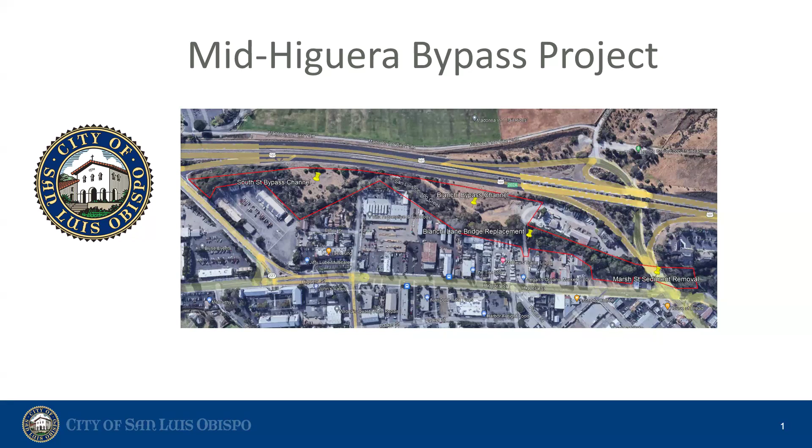Brian, ready? My name is Brian Nelson, I'm the city engineer with the city of San Luis Obispo. I'll be here today to talk about a city project called the Mid-Higuera Bypass Project, also sometimes referred to as the Mid-Higuera Flood Risk Reduction Project, which is a flood control project the city has been working on for decades now at this point.

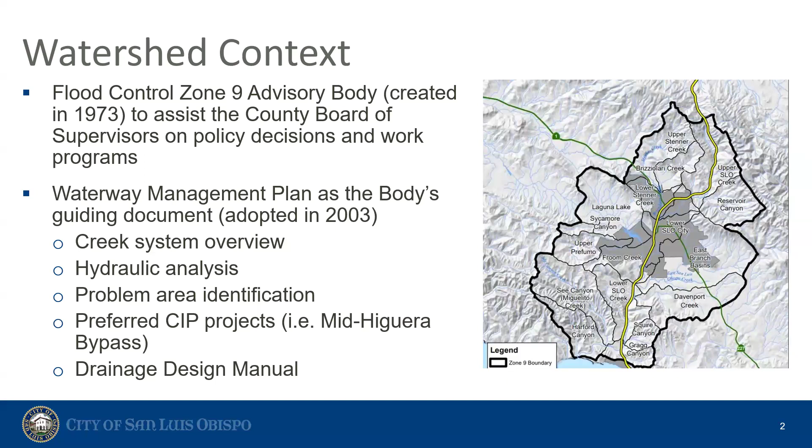This watershed is governed by the Flood Control Zone 9 advisory body to the county, which was created to assist with county policy and project decisions for the zone, as well as provide funding for programs such as this project. The guiding document for the zone is the Waterway Management Plan, adopted in 2003, which provides the framework for the creek system, the hydraulic analysis of the system to show where the flood impacts are, as well as a list of capital projects preferred for flood mitigation, such as the Mid-Higuera Bypass Project. It also establishes the drainage design manual for development within the watershed to minimize future flood impacts from development.

And Brian, I'm just hearing a little bit of making sure that everybody is oriented. So kind of across the freeway is the Madonna grass area. Is that kind of a way for people to get oriented?

Yeah, so here's the 101, so this is the freeway, and then across is the Madonna, the fields. Here is South Higuera along here. So Madonna overcrossing is right here. This is Madonna and South Higuera. Up here is Marsh and Higuera intersection.

Right, okay, so the donut store. Okay, got it. Yeah, so the zone here, the city owns open space on the west side of the SLO Creek between the freeway and the creek. And then there's all these private developments here that have property lines into the creek and sometimes across the creek.

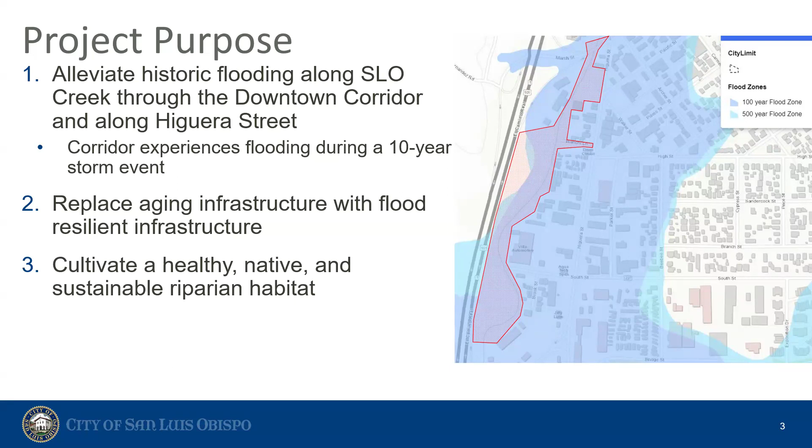So you'll hear me talk about storm return periods like 25-year storm, 10-year storm. Basically what that means is a 25-year storm, for example, has a 1 in 25 probability of occurrence in a given year, or about a 4% probability. So roughly, we generally think every 25 years or so, we might experience a 25-year storm. That's what people think of it.

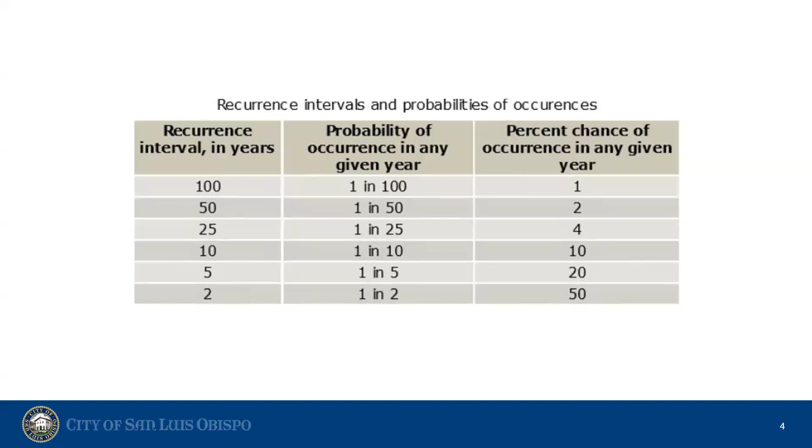So this zone, and actually at the Marsh Street Bridge, if its maximum capacity can maybe serve a 25-year storm, but with still build up in the creek, the Marsh Street Bridge actually can only handle a 10-year storm. And looking, because I think pictures tell 1,000 words in this, the location of this project, the upstream end at Marsh Street Bridge, is a site of flooding over the last 50 plus years.

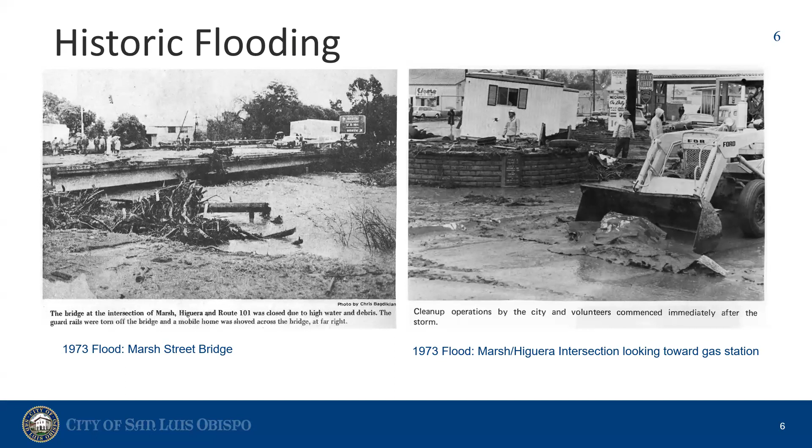Just a couple more photos here. Another flood occurred in 1973. Here again, the Marsh Street Bridge, there's the on-ramps after the flood waters receded. And then you got some cleanup work here after that same flood at the Marsh and Higuera intersections. It's the back here where I'm pointing is the gas station.

And of course, we all know about last year's flood. We saw the exact same thing occur, just proof that some flood control was needed in this area of town.

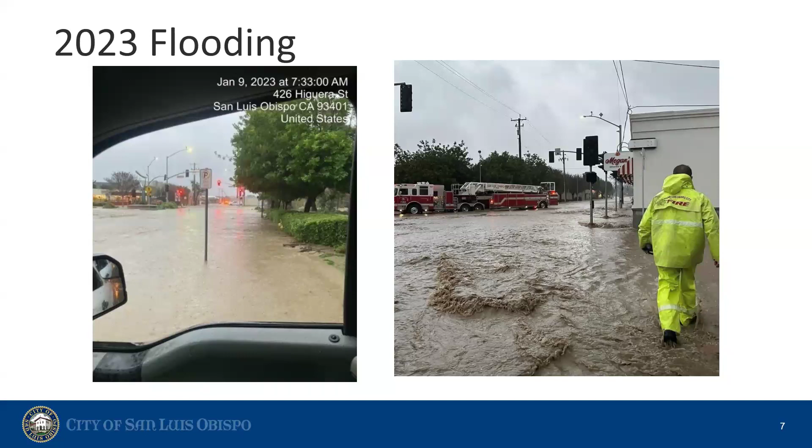Looking at the intersection again, this is looking south towards Higuera. Marsh Bridge is over here. Here's that intersection, gas stations would be right here. We've got like 6 to 10 inches of flood water right there in the intersection. This is Bianchi Lane. I don't know what time of morning this is exactly, but water's cresting the sidewalks at the base of these traffic signal poles. So about 6 to 8 inches of flow through there too.

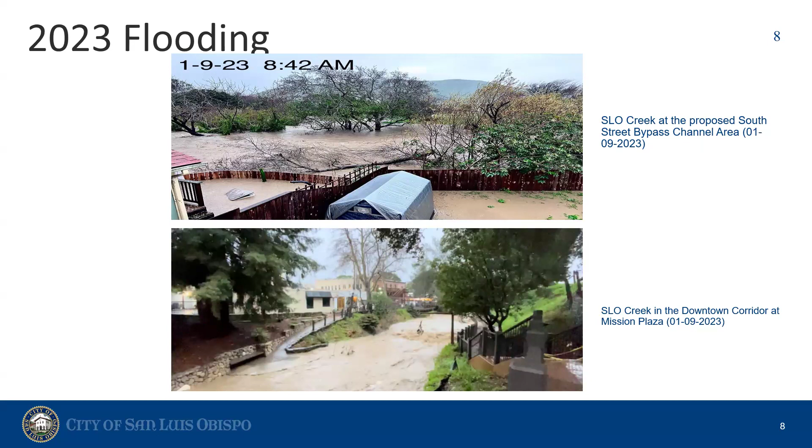One of the challenges with the creek system in the project area is that the project area is downstream of a confluence of San Luis Obispo Creek and Stenner Creek. So they converge, and that's when all the tributary area north of that really converges and backs up water through a very confined creek system.

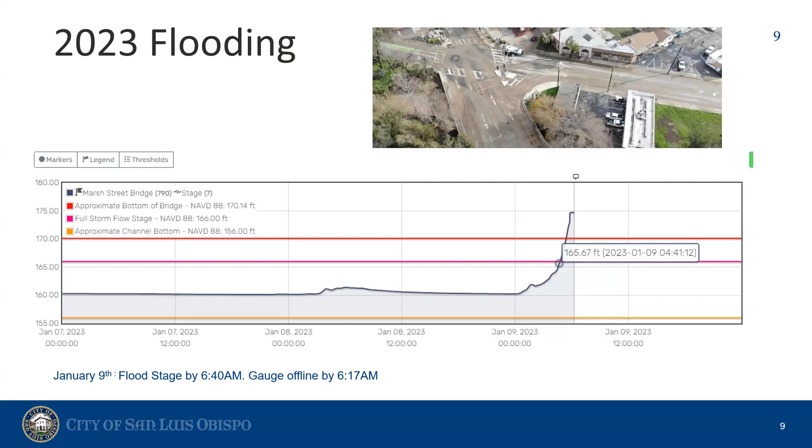Just emphasizing the benefits of this project in increasing that capacity. The other piece is that this location is usually the first to flood in a storm. We'll see flooding occur here first versus anywhere else in the city, so we really keep a close eye on this gauge.

Looking at the project features that help alleviate flooding, the major component of the project is two bypass channels through the city open space between the 101 and the creek, which I'll get to on subsequent slides.

There's also sediment removal from the creek, so any built-up accumulation of debris, such as under the Marsh Street Bridge, that might minimize capacity of the bridge. We want to remove that and maximize flow through there.

We're also doing bench grading, which is basically channel widening, where the channel pinch points are narrow and constrict the flow of the creek. Widening the channels provides additional capacity, which happens at Bianchi Bridge, which is also being replaced and doubled in length at a bypass channel.

A huge benefit to the project is removal of non-native plants and vegetation. Once you remove the overgrowth within the creek, that allows less restrictive flow, adding capacity and velocity. All these features combined increase the flow by about 40% of the 25-year storm, which might not sound like a lot, but it actually reduces floodwater elevations by 6 to 18 inches depending on where you are in the project limits.

If you think back to that picture at Bianchi, where the water was just over the top of the curb, reducing 6 inches in flood height could actually save private properties from flood inundation. So it could benefit a lot of people.

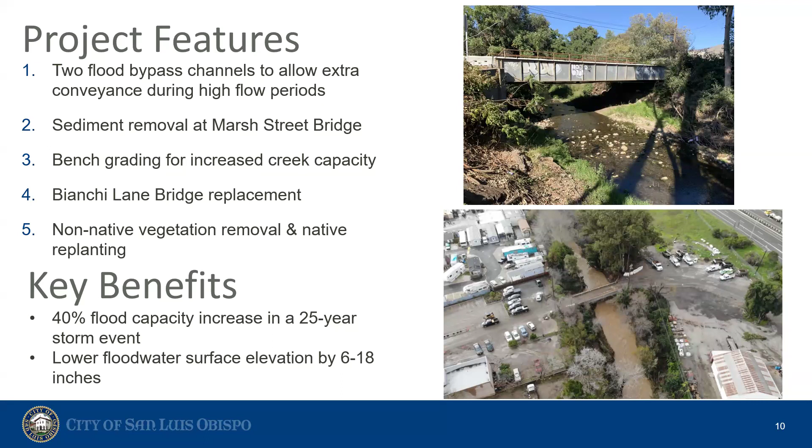This is the overview of the project limits. Sorry, the text is a little hard to read, but north is to the right. This is the intersection of Marsh and Niagara, the Marsh Street Bridge, and down here is Madonna, off the screen to the left.

I'll get some more detail on these sections. Sediment removal, as I mentioned, this is the Marsh Street Bridge. This is what it looks like after the city did a sediment removal project in the fall of last year to maximize flow through there. This project would remove any additional sediment that accumulates under that bridge.

There were three barrels under the bridge. I think this one was completely clogged, so removing that was really key to maximizing capacity. We also put some rock slope protection on the side.

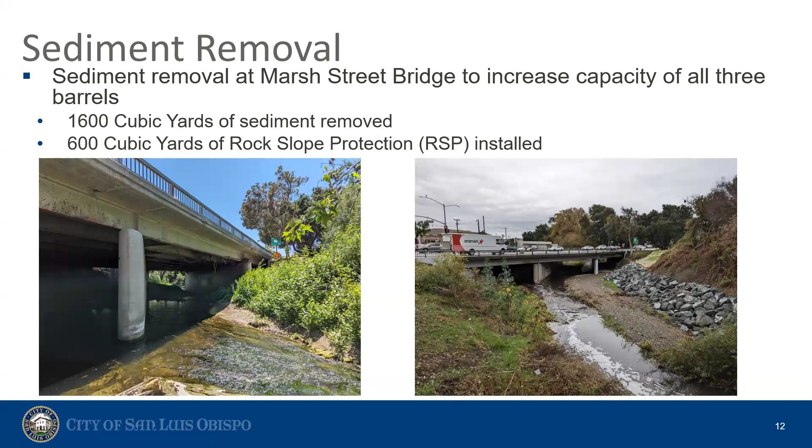This is the Bianchi Lane Bridge, which probably nobody here has actually crossed. It's very rarely used, but this is the Madonna property, this is their sort of courtyard I mentioned, and this is Bianchi. It's a pretty small bridge, about 110 years old, and will be replaced and doubled in span.

This is an aerial view of what the bypass channels will look like. There's the highway on the top side, and SLO Creek is in gray here. These bypass channels will divert floodwater starting at Bianchi, which is why the bridge is being widened, diverting any floodwater through the open space and reconverging with SLO Creek. Same thing at South Street—we've got city-owned open space over here, so this will divert any flood stage water through the bypass channel for additional capacity.

Channel widening, it's hard to see here, but there's one location where there are two buildings directly across from each other with vertical embankments in the creek. There's literally a building corner here, straight down to the creek. Very constrictive. The city will remove that building with the project and bench back the creek in this direction, just to provide that additional capacity there.

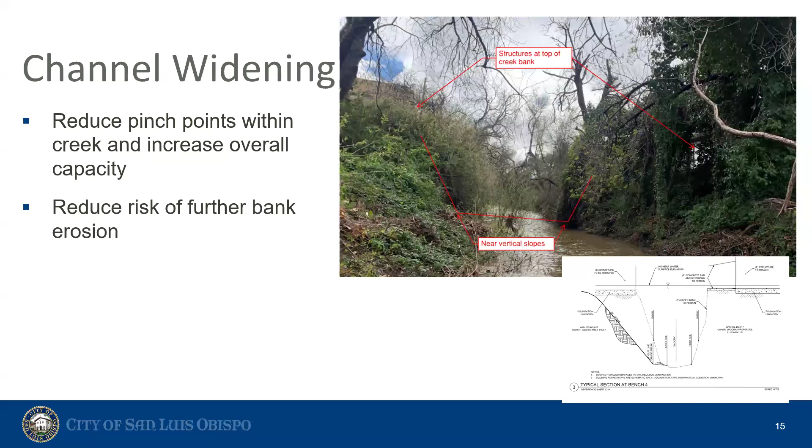What building is that? That is the Coast Rider Sports. They have a shop in the back. So we're working on acquiring an easement for that removal.

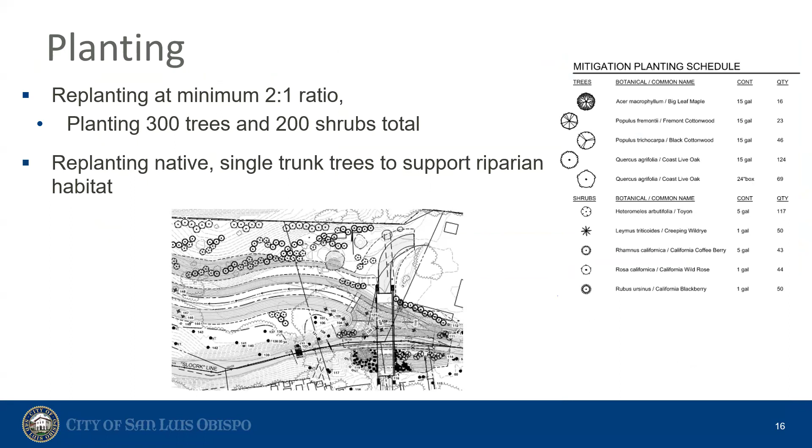So this project has been around since 2003 when it was in the waterway management plan. Initial design really started about 10 years ago with funding from Zone 9. We've been working on it over the past 10 years, making progress every year. The project received an EIR in 2017, which was when we really started to kick off design. Over the last few years we've gotten really far, but we've had some major challenges in timeline for this project.

A big component of these challenges is just environmental permitting. Every time we work within the creek, we need permits from the Army Corps of Engineers, California Department of Fish and Wildlife, and the Regional Water Quality Control Board. We just secured those permits, which took about 2 years from permit application to securing of permits.

Properties extend within the creek. You wouldn't think it, but property boundaries can go beyond the creek and go to the center of the creek. So in order to access the site, we actually have to get easements from property owners to do some of this vegetation removal. Certainly the bridge replacement needs permanent easements. Property acquisition has been a challenge for the project, and that takes some time. We're about halfway through the easements we need to acquire, but still some to go.

And then utility relocations have been challenging. There are several utilities shown on Bianchi that are outside of the city's franchise agreement with utilities. Typically if a utility company is within our right of way, they have to remove their facilities and relocate. We actually have to secure public utility easements on their behalf in order to remove and replace the bridge and widen the channel. So that's been time consuming, but we're working on it and making progress there as well.

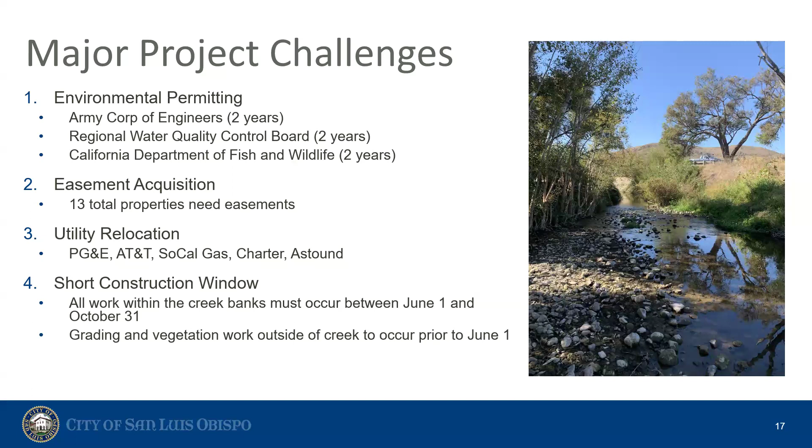So we're looking at getting that in place later this year. In looking at the timeline, the city's hoping to advertise, get our easements acquired, and get our final plans in place by the fall of this year. We're about here where this red line is, so we've got a few months to go to advertise this fall. And ideally, if everything goes perfectly, we'll have a contract in place by the end of the year and have a contractor on board early 2025 in order to hit that creek window in the time we need to.

There's a lot of lead-up to actually getting in there and doing the work, because with the bridge replacement, the contractor has to manufacture the bridge, and it's a precast bridge. So a lot of submittals and approvals have to occur before a lot of that work can happen.

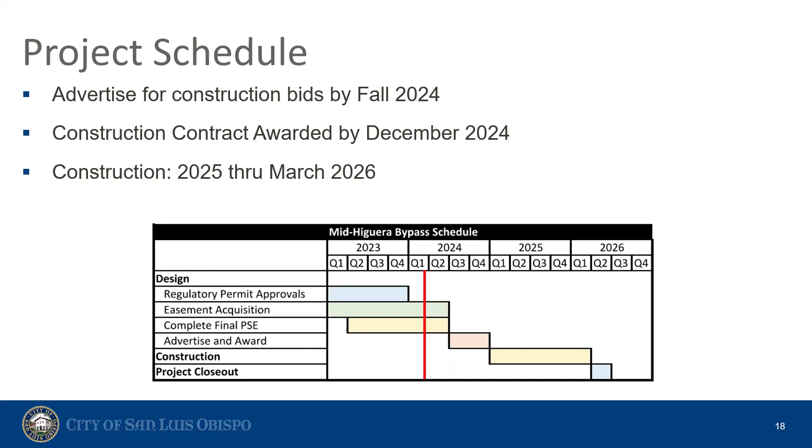So yeah, it's pretty expensive. And that's pretty much it.

So there's a 40% increase in the 25-year storm, which isn't the full 25-year storm, right? It's not as far as we would love to be, but it's a step in the right direction to lower that floodwater surface elevation in more frequent storms. So it'll alleviate the risk during those frequent storms, but not the 100-year storm. You'll still see flooding through downtown because it's the downtown city culvert that's actually the major constriction in the 100-year storm.

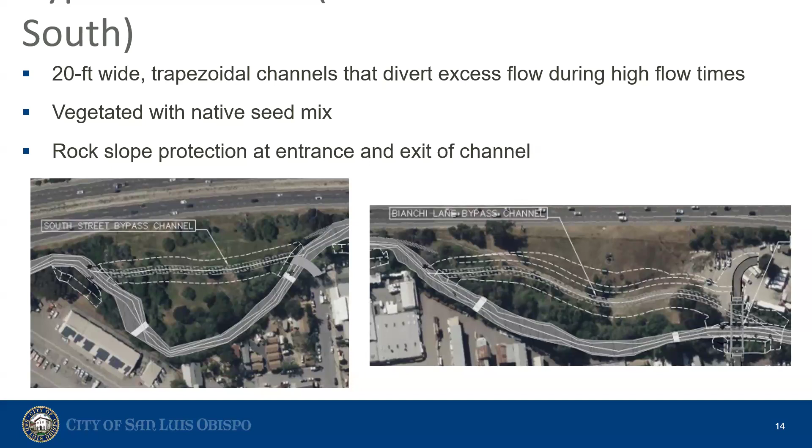Brian, where Madonna Road entrance is to the freeway, on the south side, it's visible if you come onto that, from Madonna Road onto the freeway. There's an embankment that has been riprapped there, very visible from the freeway entrance.

Oh yeah, I think you know what I'm talking about. Okay, Caltrans did that, just south of the Madonna, right there. Now, was that done due to one of the storms, or was that an early portion of stabilizing that bank before the big rains El Nino was bringing this year?

Or was that actually a starter portion of this project? So you're talking about south of the Madonna overcrossing. If you're on Madonna Road and getting on the freeway heading north. So just north of Madonna, just across Madonna Road. Yeah, I know what you're talking about now. That was actually done by Caltrans in response to the 2023 storms.

So that's within their right of way, to protect their on-ramp and their facility, outside the scope of this project, just as a protective measure. The creek is interesting because it knows no right of way boundaries or invisible lines; it goes where it wants to.

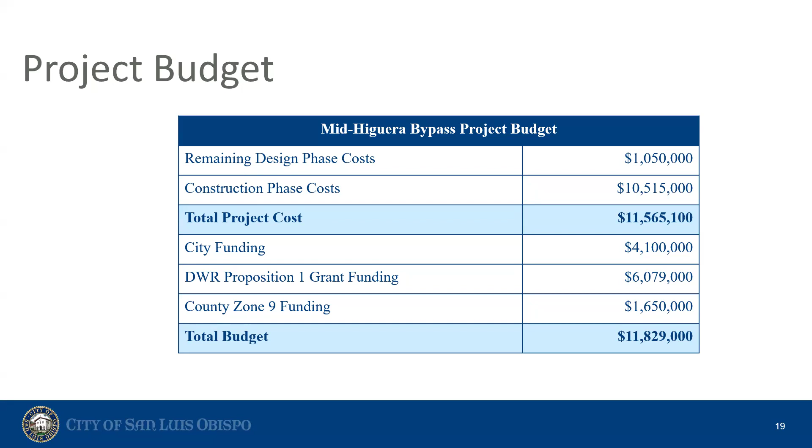My other point is that project on San Luis Drive made traffic there a nightmare. So to what extent will this project affect the traffic patterns? I think it'll be minimal. What we'll see is perhaps some impacts here at the bridge, just to get equipment down into the creek.

But I think most of the equipment will just come in through this open space here and the Bianchi Bridge up here at South Street. So access to the limits are on off side streets, South Street and Bianchi primarily. There will be some equipment coming in and out, but I don't think there'll be any major road closures of South Street for any extended period of time, because the project is just off the street.

Clarity in where you're supposed to go would be really helpful with traffic control. For those of us who drive San Luis Drive quite a bit, almost from day to day, you wouldn't know for sure exactly where you were supposed to go. I would ask friends who live there, to what extent was that changing? Well, it changes often, and they also didn't seem to understand exactly what was being done.

So good communication, I think, for those in the neighborhood, is great. That's good feedback, thank you. Yeah, I think we try to get the word out, and sometimes news blasts and Instagram aren't the right methods for some folks, but we have a communications team we coordinate with, and I'll extend that feedback to them to make sure traffic control is clear.

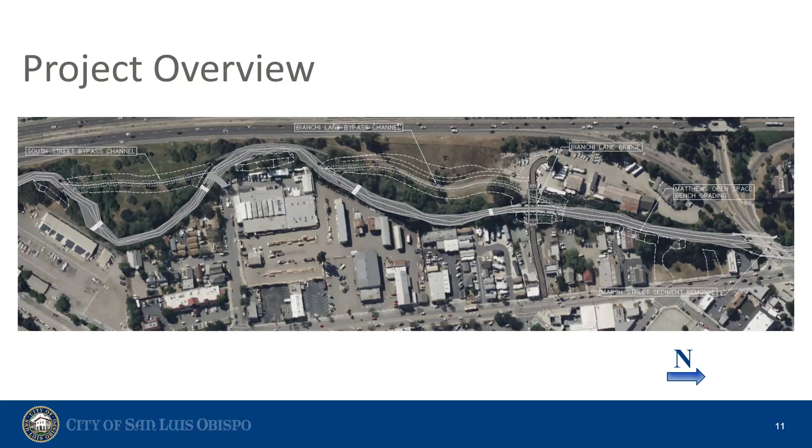So do we have history of how frequent these storms are? What's the history charted for our county and city? I didn't have photos of it, but we had some flooding in 1995 in this area as well, so that's about that 25-year period. 1973 was a year a major storm occurred, and I think 1969 was the 100-year one. But 73 was a big one too, because I think that's when, where Marty's Diner is, the freeway was underwater at Los Osos Valley Road. I have old photographs of all of that underwater.

Yeah, the city's website - slocity.org - if you Google and search flood photos, you can find these pictures. I scrolled through to find the ones applicable to the site, but there's a catalog of flood photos there. If you're curious, there's aerials showing the extensive flooding during the 1969 flood, and newspaper clippings with descriptions.

And remember, Marsh Street wasn't just named that because that was a cute name. There aren't a lot of basements along that area either - the creek's right there, and it's old. We built down in the lowland, right next to the creek in the valley, is where the founding fathers built this town, right down in the middle of it.

Well, thank you, Brian. Thank you. Okay.

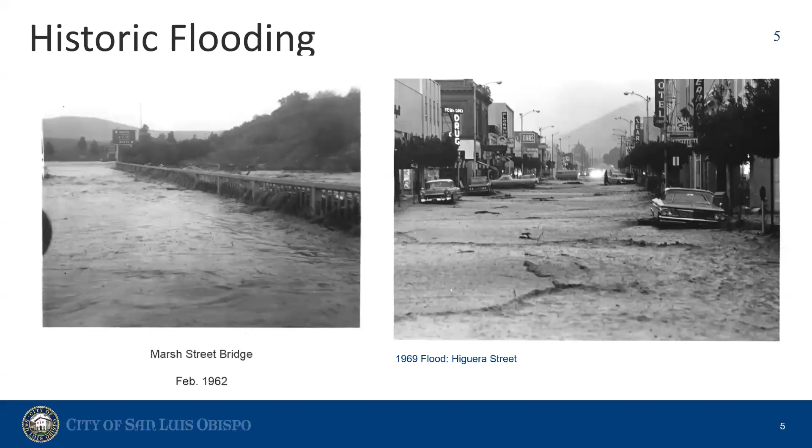We're on to item 6, which is to discuss the ad hoc subcommittee's report on the water sections of the Dana Reserve project EIR and consider actions. So just a bit of history - I think this came back to the WRAC in November and we discussed it. Linda, do you want to bring us up to speed on anything that's happened in the interim?

I am not aware of the fact that anything has happened since that last planning commission hearing, which was at the end of October. What has occurred is that we decided at that time, at our November meeting, that we would file it and keep it and wait till the Board of Supervisors were going to consider it at one of their meetings. That date has been calendared, and it's April 23rd and 24th. So it's time to bring our analysis of the water section of the EIR for the project and decide what we want to do with it.

And there are three options. One is we can send it, not send it, or we can amend it and send it. I don't see any reason to amend it and not send it. So there's only three options.